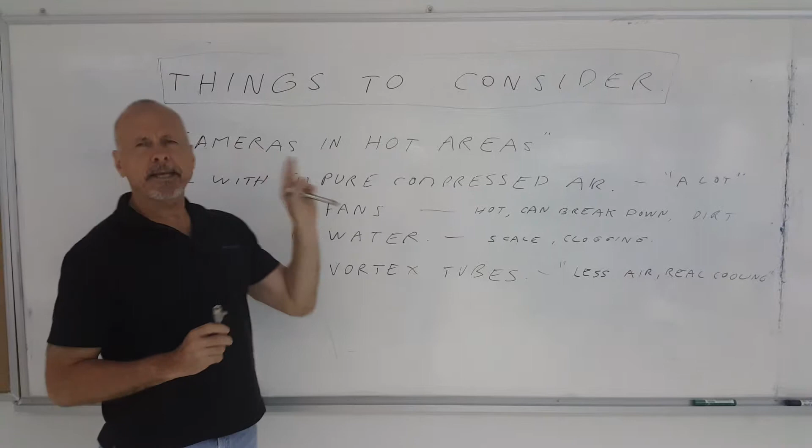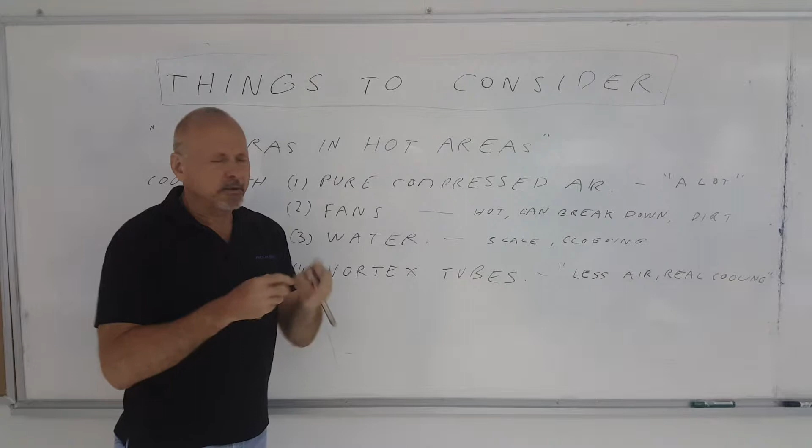Today we're going to talk about cooling cameras that are used in very hot areas in production applications. Cameras are used extensively in manufacturing, even sensors in very hot areas to control production processes, to check on quality control and so on.

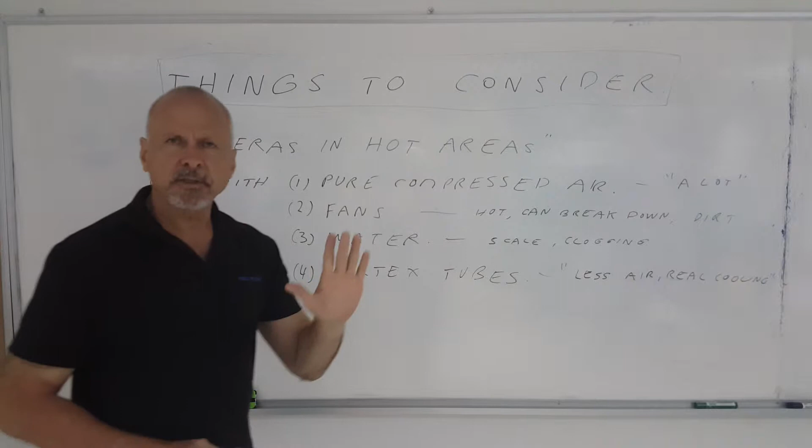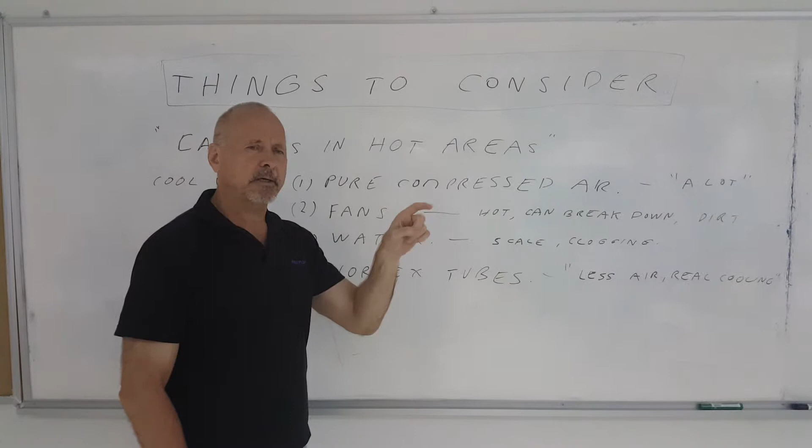And these units have to be cooled, so there are various ways to cool these items. First of all, you can use pure compressed air. The problem is when you have a remote camera in a hot area and using pure compressed air, that compressed air is going to be quite hot, so you're going to use a lot of it because it's hot.

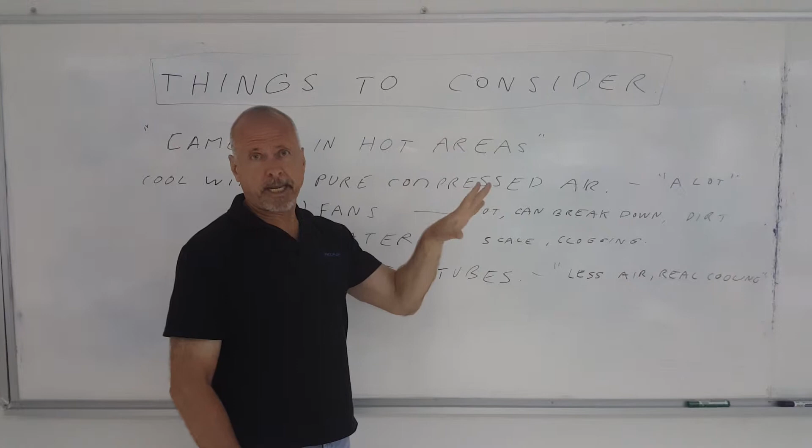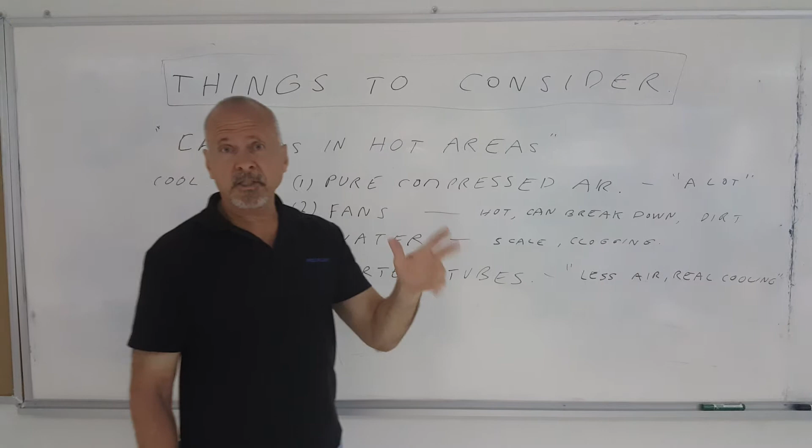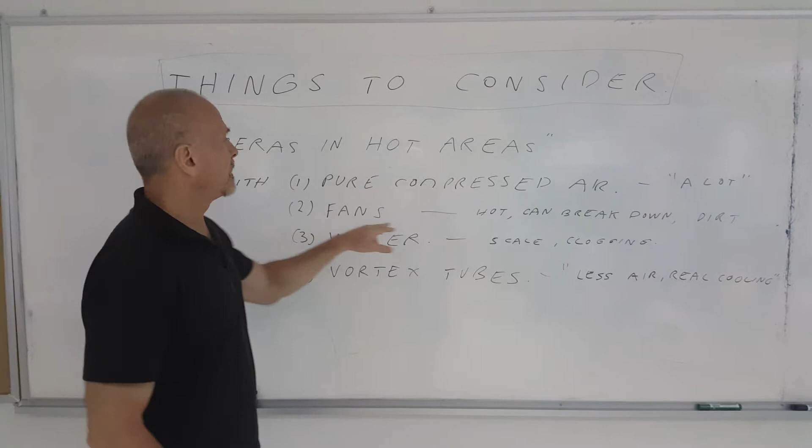Another thing you can do is have a fan on the camera, or a fan cooling the camera. However, again, this camera is in a hot area, quite often in a remote area, so it's going to be very hard to service that fan. That area can also be quite dirty and humid, and it could be subject to breakdowns, and dirt in the area can ruin the fan as well, and dirt can also get into the camera and damage it. So a fan is not always the best idea to cool a camera in a very hot area.

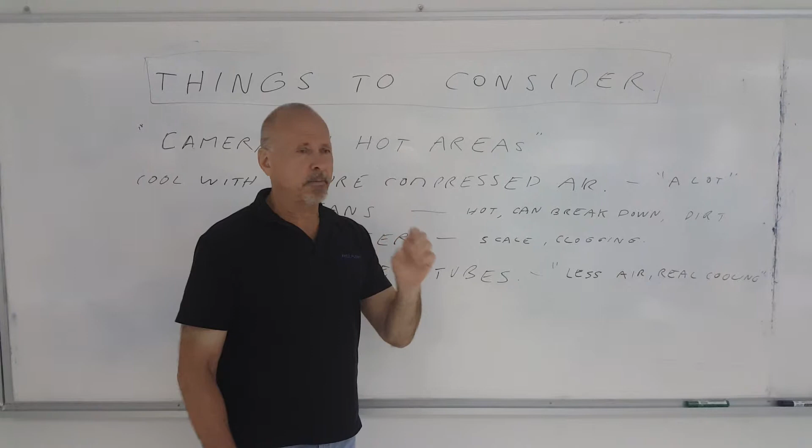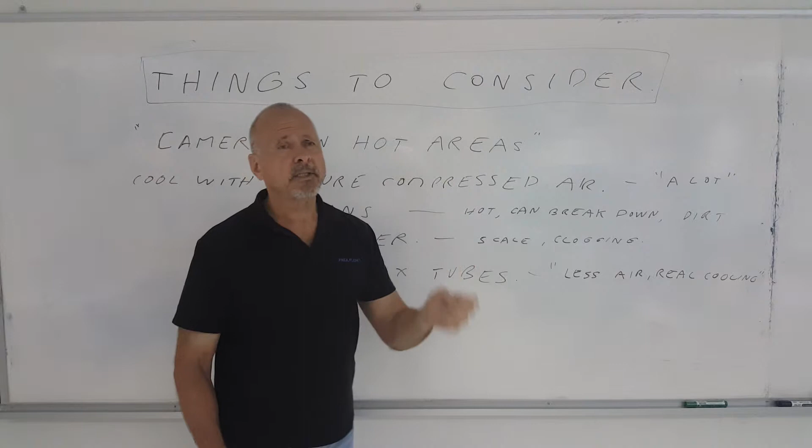You can use water. Water cooling is an excellent option, except that water used to cool cameras is usually supplied in very small lines. These small lines, as a result, being in a hot area will warm up the water, and you can have scale buildup. So unless that water is treated very well, because you're dealing with very small lines, you could have scale issues. That's one of the drawbacks of using water for cooling. And of course, if it gets scaled up, you get clogging and the cooling effect disappears.

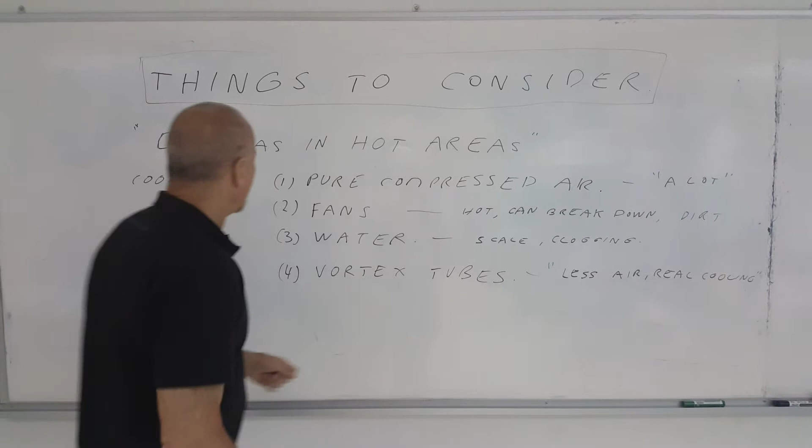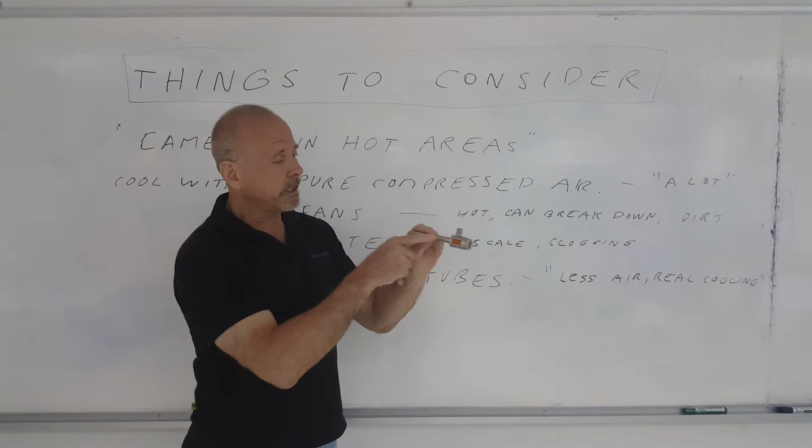Finally, you can use something called a vortex tube. I have a medium-sized vortex tube and a small vortex tube in my hand. A vortex tube takes compressed air, spins it one way, getting hot air coming out one end and very cold air coming out the other end. You can get down to -40 degrees Celsius quite easily with a vortex tube, although you wouldn't use it to that cold a temperature.